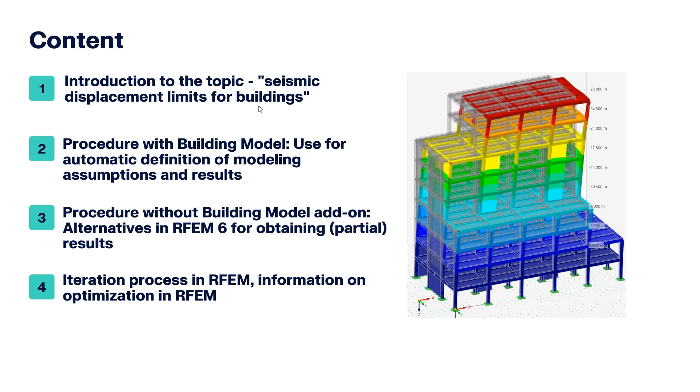Let's get started with the first topic, the introduction to seismic displacement limits for buildings. The reference for today will be Eurocode 8, design of structures for earthquake resistance. This reference applies for the whole of Europe, particularly maybe in countries like Germany or low seismicity countries it's not that relevant, but we will make here an exercise or example in which the seismic displacement is the controlling action, the seismic action.

I just want to remark that I'm going to present several sections from Eurocode 8, but not all the requirements are exactly what I show here. What I want to say is that this summary can be understood as a good pre-dimensioning tool, or a first iteration procedure, but further requirements and sections have to be complied with according to Eurocode 8. It is recommended that a full review of the norm should be taken into account. As I say, this is maybe the first step for these checks.

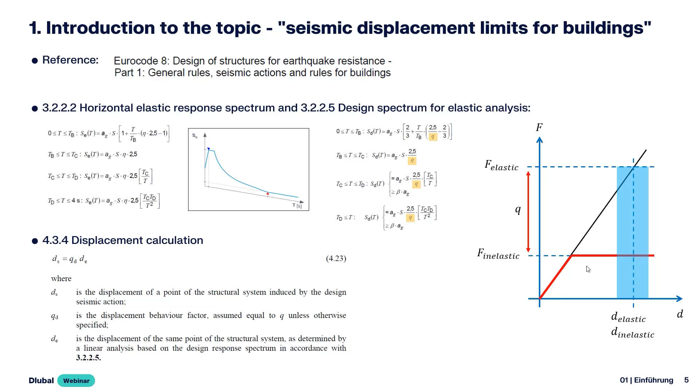Now I jump to the third section here: the limits of the so-called interstory drift. First, here's a picture of what interstory drift is. It's the relative displacement between the top of the story and the bottom of the story. We have to control this measure of displacement in each story, not necessarily over the overall structure.

We have three limits, and these limits are for dimensioning and design of structural elements, but the description or classification of these three limits depends on the description of the non-structural elements.

It's very important to take this into account from the beginning, in the prefeasibility or other early stages of design. It's quite important to define the description of the non-structural elements.

If we have brittle materials, we have a certain limit, while the description of ductile non-structural elements might be really important for the construction site. The costs of these non-structural elements according to classes B or C might be too high, and we may have to switch to approach A.

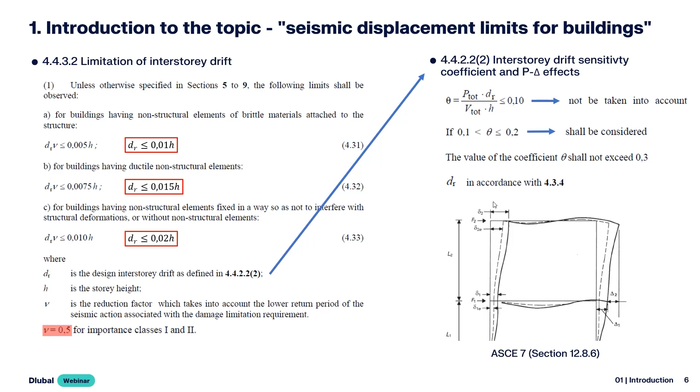And once again we see here another reference to our second section, 4.3.4, which means the multiplication of the displacement based on the design spectrum. So, let's start on the second chapter of today: the procedure with the building model.

I have 4 steps and then a couple of sub-steps. I'm going to once again present several sections from the norm, and after that I'm going to jump into the model. Let's check out two important sections here.

The first step: modal analysis. Based on an available model, we will define a modal analysis, and after that a response spectrum analysis. For this, we want to take into account the stiffness according to 4.3.1 and subsection 7.

That's why I started with this figure in the introduction. This section recommends that the stiffness, when cracking takes place, should be taken into account. This cracking takes place in the inelastic response. If we say the red line is the actual response of the building, at this point we expect some reduction in stiffness, and the recommended value is half of the corresponding stiffness of the uncracked element, for shear and for flexural stiffness.

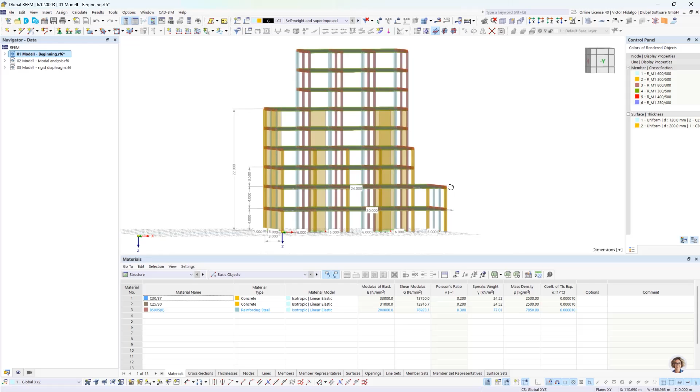So I'm going to start with a description of the building. We have a very irregular building here, with jumps in the geometry of the stories, and I did this on purpose to illustrate the concept of irregularities.

Just as a quick description, we have here a reinforced concrete building with walls, very stiff walls one can say. I'm going to show them here with visibilities. In the navigator views, we have some predefined visibilities which help us with the inspection of the model or visualization.

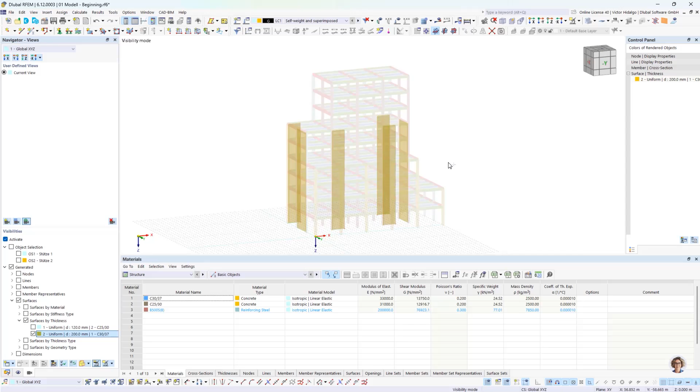So we can see here 6 walls which are conceived to limit the lateral displacement of the structure, exactly this interstory drift.

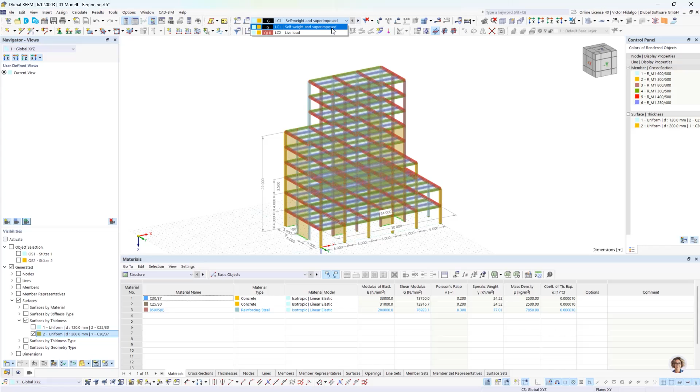Okay, I'm gonna cancel the visibility, come back to the original view, and show the loads definition. So I have 2 load cases: self-weight and superimposed live load. In this case, I have a very general definition, quite simple for today's exercise. Yeah, of course, so that's our base model.

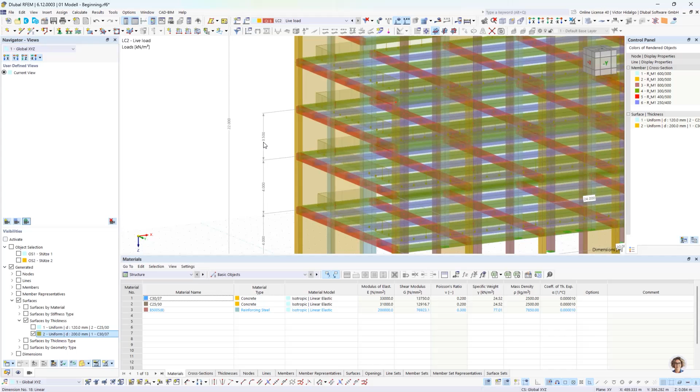Also, just to say, the first 2 stories have a height of 4 meters, and after that we have 3.5. So this is gonna be important when activating the building model. Okay, so we have this general overview, and now we want to define our model analysis.

For this, we will go to the button Edit Model Base Data, and here we can activate the desired type of analysis. In our case today, dynamic analysis. If I click on Response Spectrum Analysis, modal analysis will be automatically activated. And according to what I want to calculate, I can select other add-ons.

In this case, it's just of interest, this dynamic analysis, and take into account that when we activate something here, we might need to provide a norm or design standard for the corresponding new feature in the program. So in this case, I'm gonna leave Eurocode.

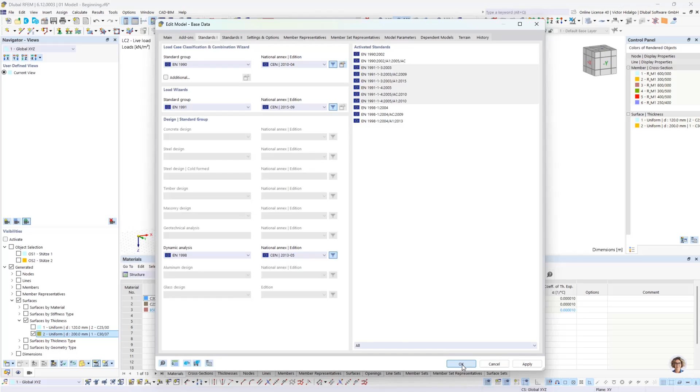Now I can go to edit active load case. In this menu, I can create a new load case of type modal analysis. So I'm gonna call it modal analysis 1, and this is gonna be basis 1.

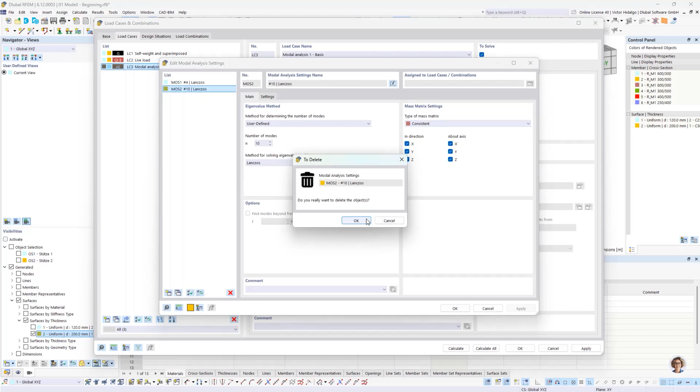I'm gonna edit the settings. I erase the second, and I'm gonna make here a typical definition for modal analysis to reach effective modal mass factors, typical value of 90%. And then we are limited to this method for solving.

On the mass matrix settings, I'm gonna choose diagonal on a classical building analysis with the 2 horizontal components and just the theta component, so the torsional component.

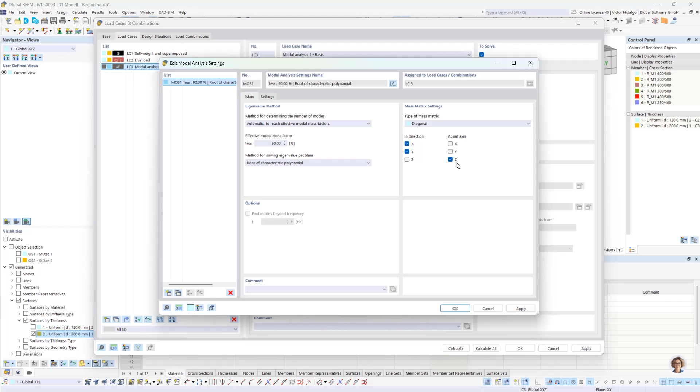Apply OK, and then we have to select a proper import masses only from load case load combination. Each code defines the kind of combination of vertical loads that has to be selected here.

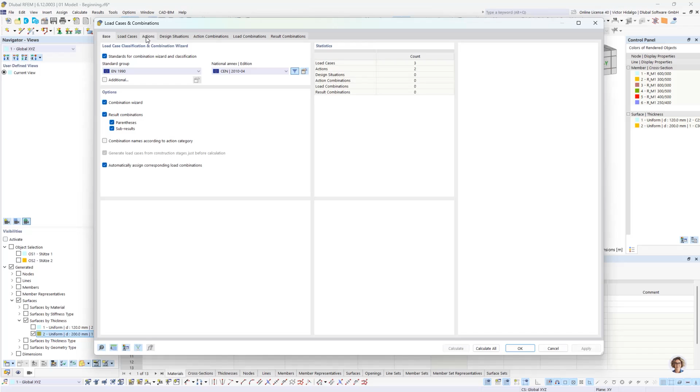I'm gonna show how to do this from scratch. So this means here in base, in the tab base, we can activate our combination wizard or assistant. With this, we can automatically generate combinations according to the norm, the selected norm, in this case, Eurocode.

In design situations is the basic definition, and we select here, for example, seismic mass combination. With this, we will get subsequently here in load combination the corresponding factors and multiplication according to the desired design situation.

Here in assignment, we see a factor of 1 for self-weight and superimposed, and live load with 0.3. So that's according to the norm. So that's quite useful in our program.

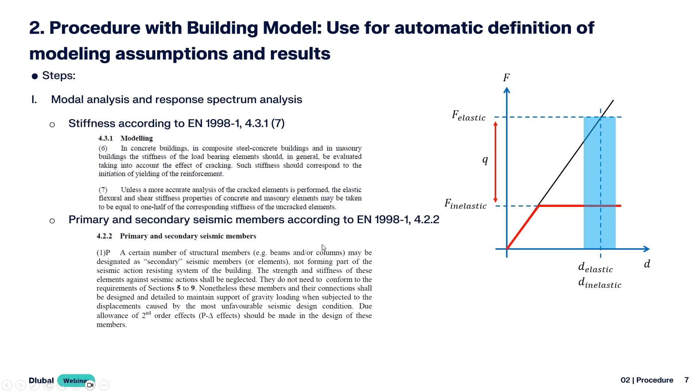So after this, I can define a second modal analysis, and we are gonna do the following thing. So this is gonna be the basis. In this case, we are not considering any of these two sections. Then we will make a second iteration with just the 4.3.1, and then a third iteration with these two sections. Yeah, okay, let's do that.

So I'm gonna copy this one. Okay, and after copying, I'm gonna change the name to 2. I erase this here, and I prepare in advance a structure modification.

This is quite a useful tool in our program, and it's very useful in this case. So I have 2 definitions, I'm gonna show them. So here you can activate what you want to have, in this case members and surfaces. And for members, I made the following definition.

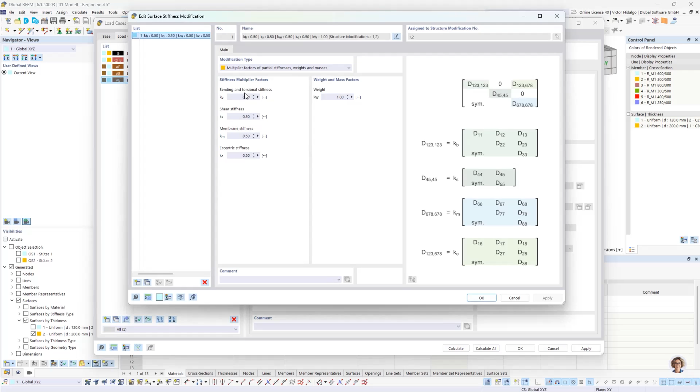I'm going to select the second structure modification. I forgot to show the surfaces definition in the first structure modification, but in this case it's also a 50% reduction, so this stays the same in the second structure modification.

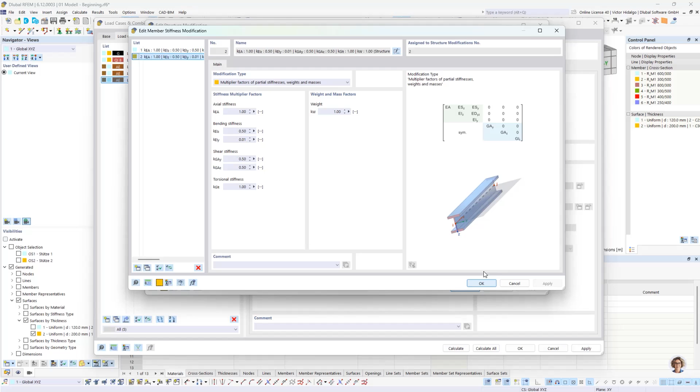What I did here is make a strong axis definition of stiffness in the members. This is the bending stiffness. I'm ignoring the bending stiffness around the weak axis for certain elements—what we can call secondary beams, or just vertical beams.

I'm going to show in the program what's the effect of not considering these elements that do not belong to the main earthquake resisting system, or lateral force resisting system.

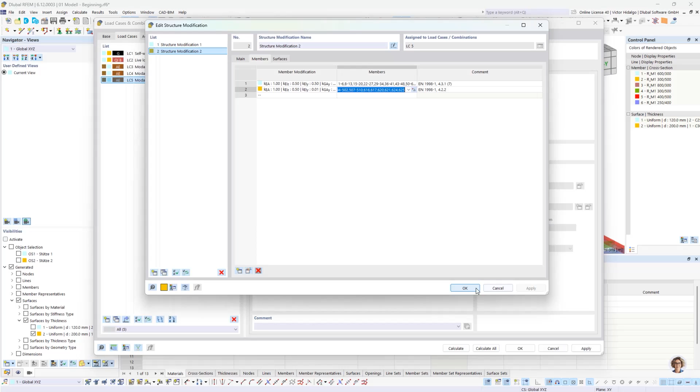Here I can write the second paragraph. So we accept this and we can run the modal analysis. It takes around 30-40 seconds for each modal analysis, so I already did it for today's presentation.

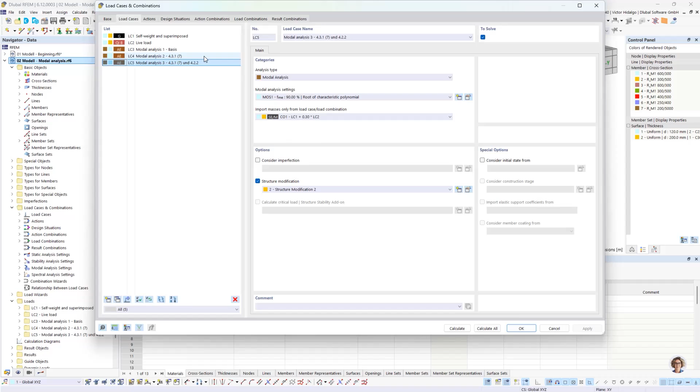I'm going to show that the definition is exactly as we did before. We are going to take a look at the modal analysis results. On the table we can go to modal analysis, natural frequencies, and we see for our iteration number 1, a natural period of 0.92 and 0.76.

If I change to the second iteration, the stiffness reduction, we will see a huge change in the structure, from 0.92 to 1.24. It's quite a big difference, and it's very important to always keep in mind this requirement about stiffness. This is a typical or classical assumption in earthquake analysis, and here we can see how different this is—quite a different approach compared to design used for vertical load. We don't normally do this for vertical load.

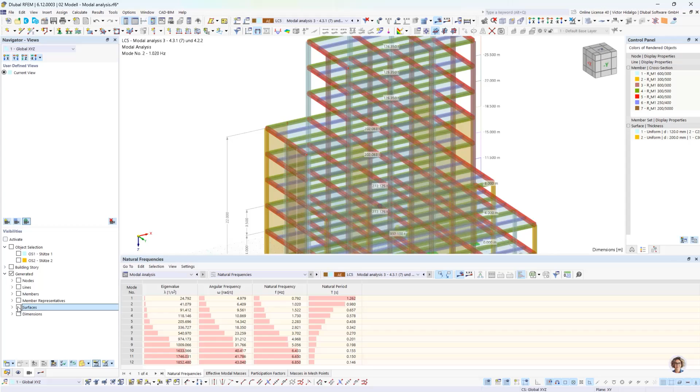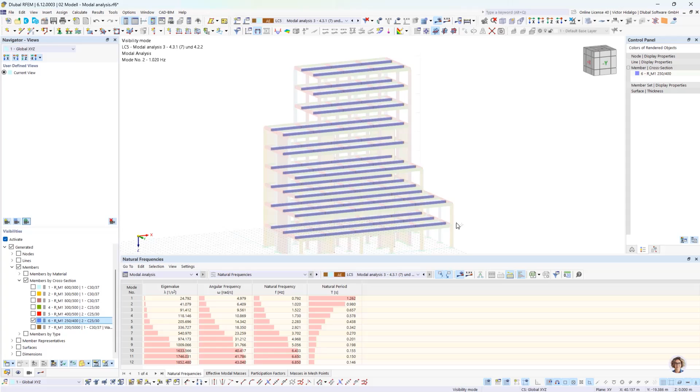Modal analysis number 3: here we have the consideration, or non-consideration, of the secondary elements. In this case, the secondary beams—I'm going to show them here in members, cross section. I'm saying that all these secondary beams will not have flexural stiffness around the strong axis, in order to avoid their participation in the lateral stiffness, as we expect these contributions shouldn't be that big since they don't connect to any column—there's no frame. We can see that the result remains almost the same, just a small change in the decimal places.

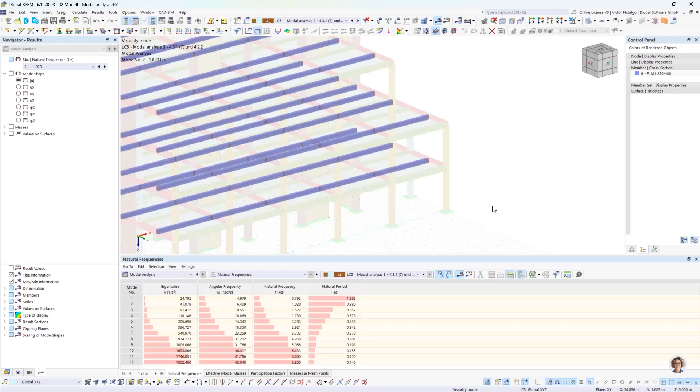After this, I'm going to work with load case 5. This is going to be our reference, and just to show you how you can inspect modal analysis results—a quite important table here, effective modal masses. You can see, for example, if you want to display the deformed shape of a particular mode, you can select in this drop-down menu what you want to display. Also important is the factor for effective modal mass here.

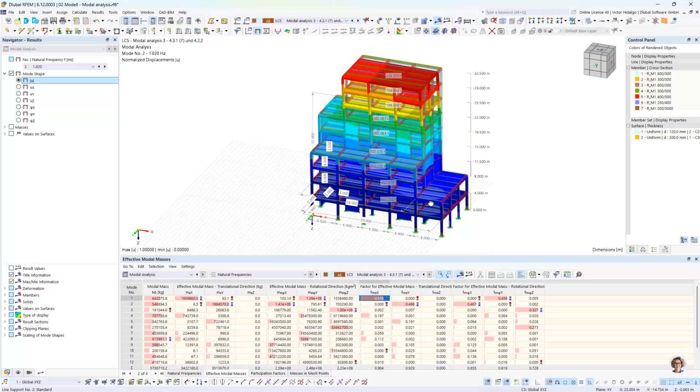I selected this geometry to show a very particular effect when we have irregularities and also a very stiff element, such as walls—so-called shear walls—combined with frames. This interaction plus the irregularities creates a particular condition where the fundamental mode has a participation of around 50%, which is relatively low. We are used to seeing maybe 70 or 80%, and with these particular geometric conditions we can see that the second order modes are quite important in the building's response.

Okay, just wanted to show this. Now I want to define a response spectrum according to the content in the presentation. After doing this modal analysis and this stiffness, primary and secondary definition, we can make the definition of the horizontal elastic response spectrum and design spectrum.

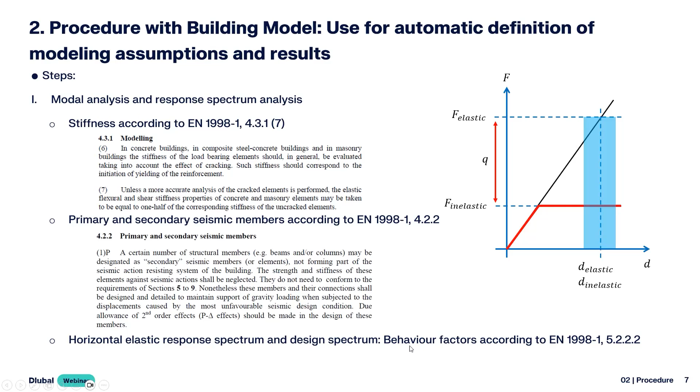Here it's important to make a definition of the behavior factor. The behavior factor is defined or specified in section 5.2.2.2, so I recommend a full review of this section. In this case, for our concrete structure, I made a definition.

How this works is that according to the location and according to the norm for a particular country, it is defined which ductility class, or which kind of requirements, I have to fulfill for this particular place. For example, in Italy, with high seismicity, I have to select a structure that fulfills particular requirements. This is provided by the norm.

Because of time I can't give a full explanation, but let's assume that according to the location of this building, I have to use ductility of middle class type. Based on the description of our system, we have a dual system, coupled wall system, and this is the base definition for our behavior factor.

As we see in the title, it's for systems that are regular in elevation. So I can calculate the first or basic value of the behavior factor, and after that I have to check for irregularities. In this case, the building is irregular. I recommend you check out the section in detail after the presentation, but here's a definition.

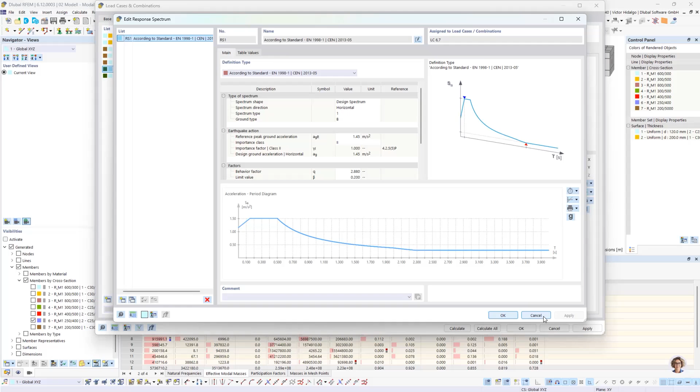Important here also is to create a second response spectrum, and as we saw, if we use a response spectrum of type design spectrum, we have to multiply the results for displacement. So in this case I'm gonna do this in a particular way here, but there are many ways of doing this.

What I'm gonna do is create a second analysis, and I say okay, if I multiply again by a behavior factor Q, then I get this.

And I'm gonna use here this scale factor definition. So if I multiply again by the behavior factor, I'm gonna get the correct results for displacement.

Okay, I accept this, and now I can run my response spectrum analysis. I'm gonna jump into the presentation once again, and okay, now we can make the activation of the building model add-on.

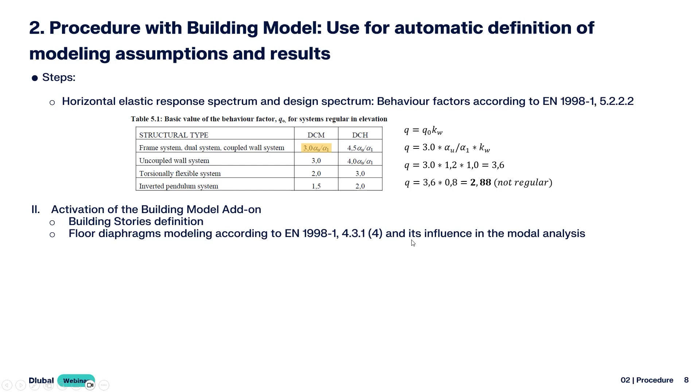Before running our response spectrum analysis, I'm gonna make the building stories definition and the floor diaphragms modeling according to this section 4.3.1, and I want to show the influence in the modal analysis of this.

This floor diaphragm modeling makes reference to a very famous assumption in seismic design or seismic analysis, the so-called rigid diaphragms. I want to say that it is not a better or a worse definition.

It's difficult to make a general rule whether we have to use this in our case or not. There is a condition here, a physical condition or a clear rule where this assumption can be implemented in the model, but generally this is a very engineering concept and interpretation, whether we are allowed to use this or whether we should use it.

Now I just make reference, but as I say, if you are in a case in which you might want to implement this, my recommendation is to run a couple iterations, as I'm gonna do right now, and try to have a feeling about the results and try to make an interpretation whether it is appropriate to consider this or not, or what are the effects of this, beyond it being typical to do it, so let's do it.

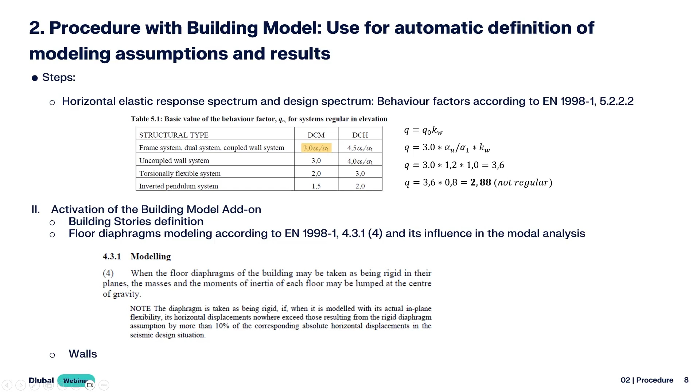And also here in the activation of the building model add-on, we can define walls. I'm gonna activate this. Once again here, edit model base data. And okay, there was already a definition.

Okay, so building model. When I activate this, I get here in building model this object or this folder, and I can edit the definition.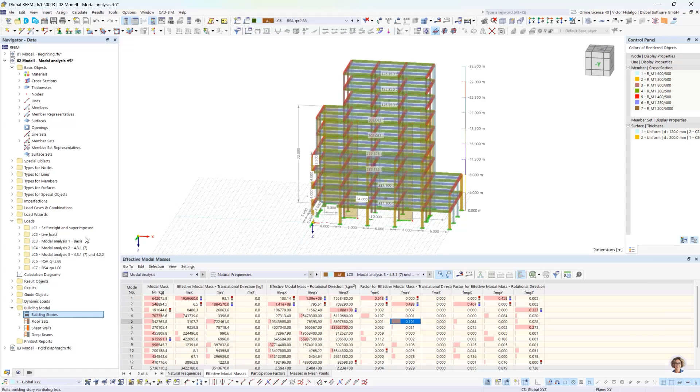So I had here a predefinition with two different stories, but I'm gonna erase this in order to display how it works. So I erase the building model, and I'm gonna generate building stories from scratch.

Then I go to edit, and the program automatically recognized the different floors, or the planes of the horizontal element. With this automatic definition, we can save time in the definition of the stories, and it's quite useful to have this manual definition.

Now we can make global adjustments. In this case, I'm gonna leave this as it is. For floor diaphragms, I'm gonna consider no assumption in the stiffness, so I'll leave original stiffness. I have a second model with the rigid diaphragm, and we can see a basic difference between these two approaches.

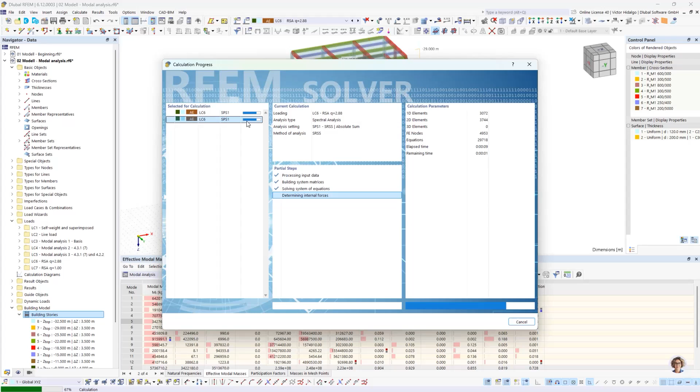Okay, I'm gonna leave that and run this response spectrum analysis. It takes not that much time since the modal analysis is already available. Here we can see the progress bar and an estimation about the remaining time.

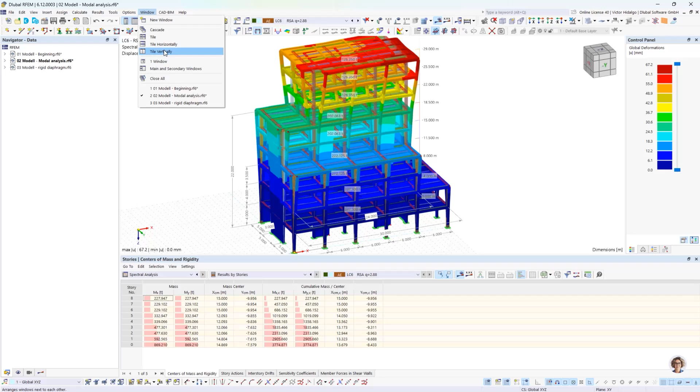Okay, here I have the same model so far, but with a model definition of rigid diaphragm. I want to show this for comparison purposes, so I'm gonna use window, tile vertically, and then close our first model.

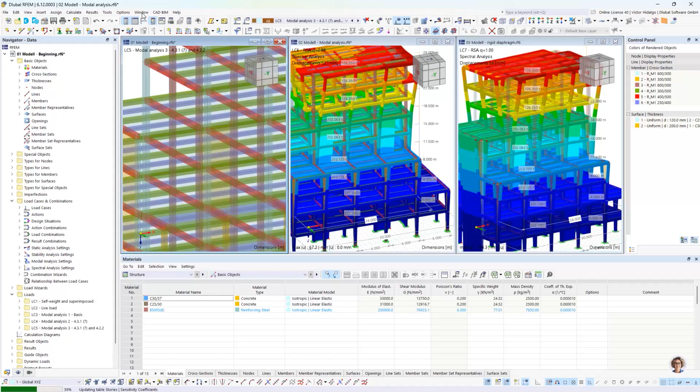Okay, and then once again I'm gonna go here, just takes some time. Window, tile vertically. So we have on the left the results for the model without rigid diaphragm.

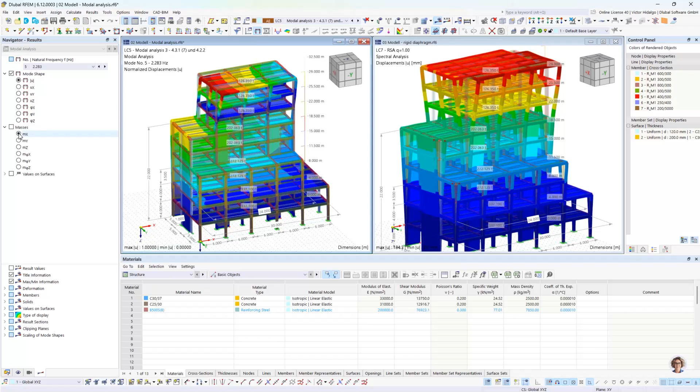In this case I want to display once again the results for modal analysis, and I'm gonna use this result for masses. What we see here is that according to the mesh settings on the program, with this basic definition we have a mass definition on each point of this mesh.

So this is quite a complex mass matrix definition, and if we activate the option of rigid diaphragm, I'm gonna show here, we get a very simplified description of the mass matrix.

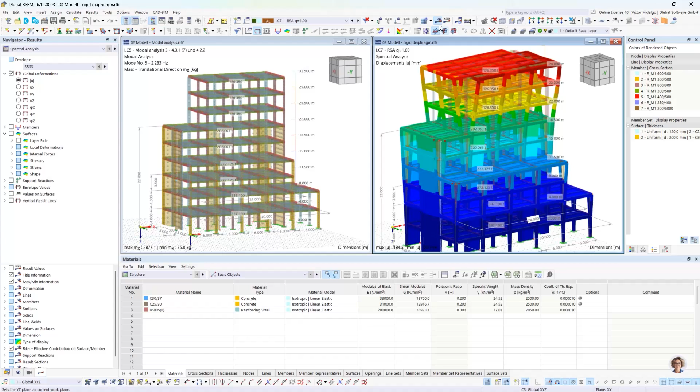So in the first place I want to show you the definition in the building model add-on. In this case I have the same definition, but I selected all stories and created the rigid diaphragm, floor diaphragm as rigid.

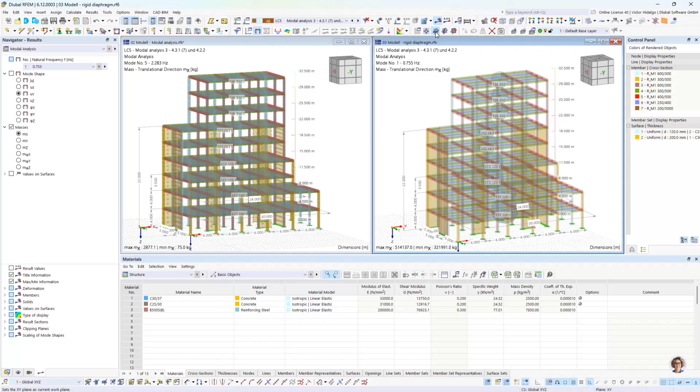I already ran the analysis just to save time, and in the same way I'm gonna look for the results of the modal analysis, iteration number 3. Once again the masses definition, and we see a huge difference in the masses definition.

Now in this case we have what we call lumped mass definition on the center of the element, or of the floor. So this helps a lot in the analysis time for this model.

Okay, once again it's important to keep in mind that this has to be analyzed, whether it's better the option on the right or on the left. There is no general rule for this.

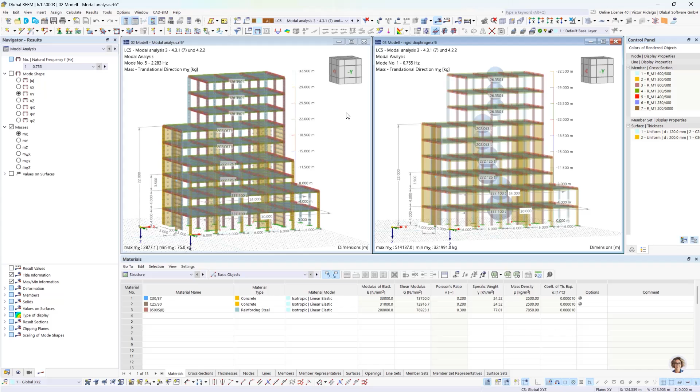Okay, I'm gonna jump on the model on the left and I'm gonna show something: the walls definition. So I'm gonna make a new shear wall definition.

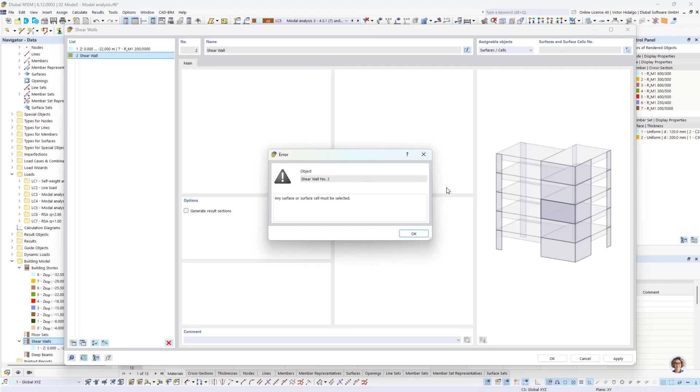There is already one, and this is quite versatile because I only have to select the surfaces and the program is gonna recognize the geometry of the wall. So I'm gonna select this wall, simply all the surfaces, and the program is gonna recognize the cross-section dimensions.

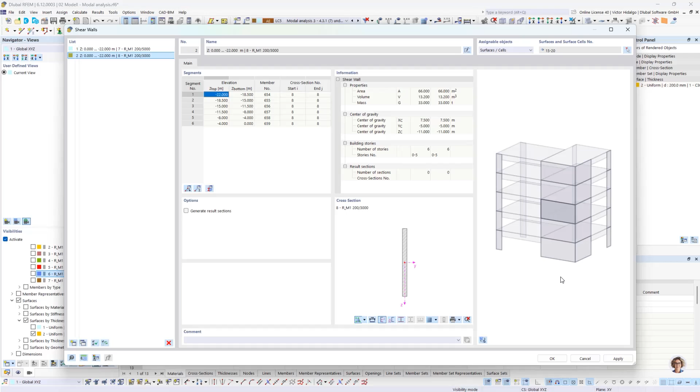And also the floors definition, and with this I can integrate the results for the areas, because for design we need the results in form of a member. Exactly, so this is quite versatile and useful for a quick definition.

Okay, I have to delete results after creating a wall, and we see here an internal element that's gonna integrate the results for all these areas.

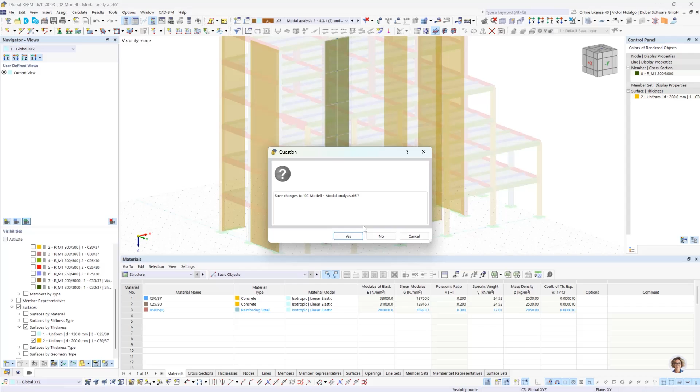Okay, at this point I'm gonna close this model, and I'm gonna stay in the rigid diaphragm model for the last part of this section. Okay, I come back here.

We activated our building model add-on, and now we have to check the requirements for the limitation of interstory drift. According to the floor definition, I made here the multiplication, and our limit is gonna be 35 millimeters. I'm gonna select brittle materials for non-structural elements, and in the first place I have to check the requirement of P-delta effects.

Okay, and finally we can deliver the results for design.

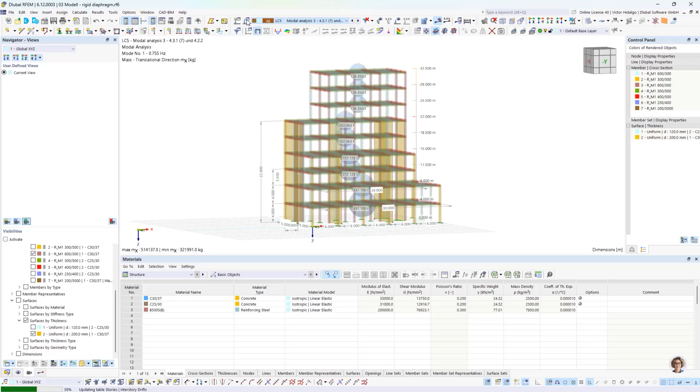So here, important: if we are gonna check displacement results, remember we have to use the multiplied displacement from the response spectrum. So in this case, once again, I have to use the response spectrum analysis definition with the scale factor.

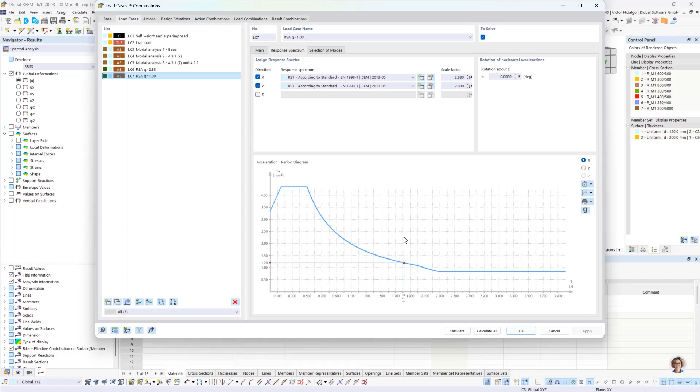This is quite important since the beginning of today's presentation. Okay, I'm gonna run this analysis. Oh, sorry, yeah.

So, it's already there, the analysis, and in this case, with the spectral analysis and the building model, we have an additional table of results, and this is what we are going to inspect right now.

This is the results by stories. Here we have this group of tables with quite important quantities: centers of mass and rigidity. The calculation of center of rigidity is quite particular—we have to take into account the shear walls and the particular stiffness of each column. So this is a very good result or summary for our structure.

In story actions, we have the summary of story forces, its delta, and the location of resultant story forces. So for checks of stiffness irregularity, if required, this table provides the base information for it.

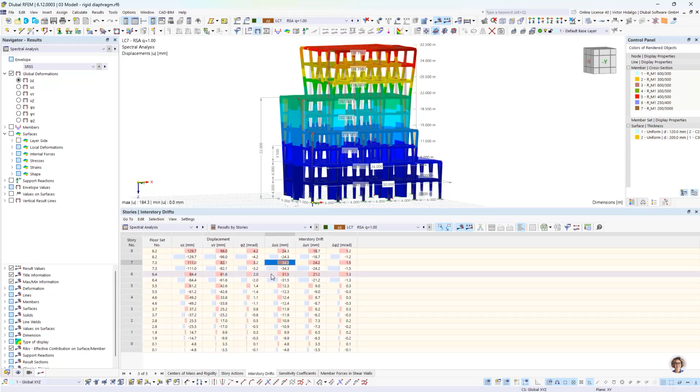So I made several iterations to, in the cheapest way or with the smaller sections, achieve this value. And of course, this is the objective of the design now—the most economical way to fulfill the requirement.

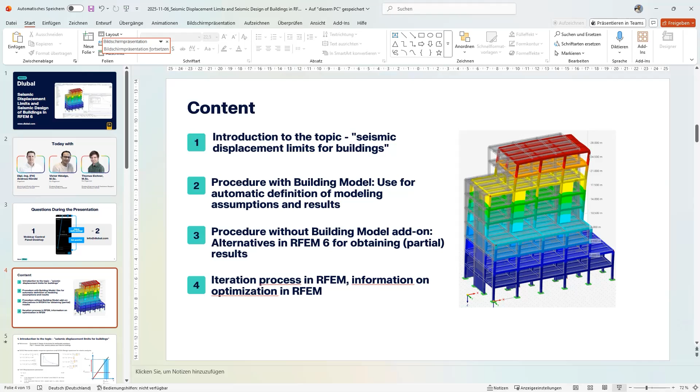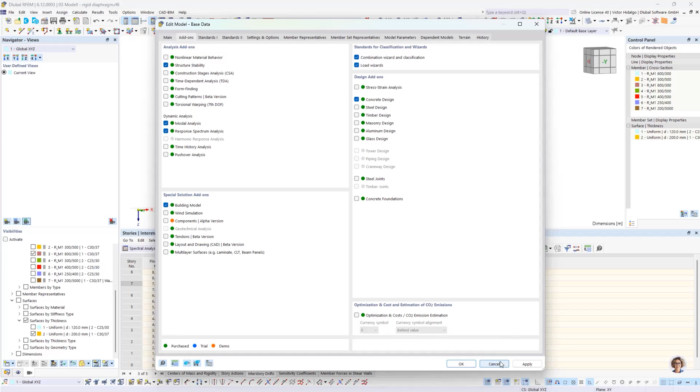So this part is done, and after this we can see how we provide the design add-ons with the information for design. In this case, I already did it, so we can activate the concrete design add-on, and in accordance to this, we can create additional design situations—in this case, seismic, or permanent and transient.

Important: when we have seismic and we want to consider response spectrum analysis results, we have to use a result combination. Otherwise, we cannot consider these results. So in result combination, we get 2 because we have 2 response spectrum analyses.

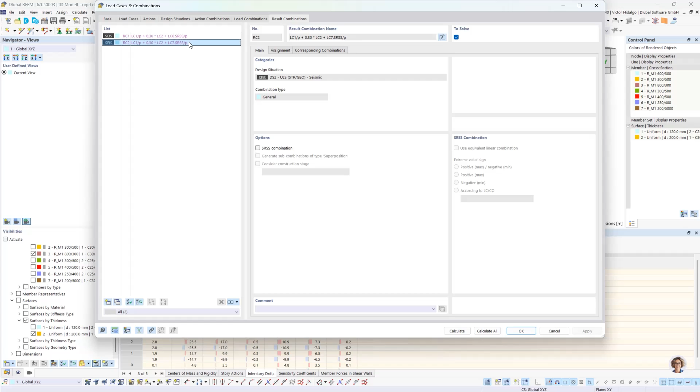And after this, I can go to the table design, or concrete design, and make the definition. I'm going to make input data here, so we can select what we want to do.

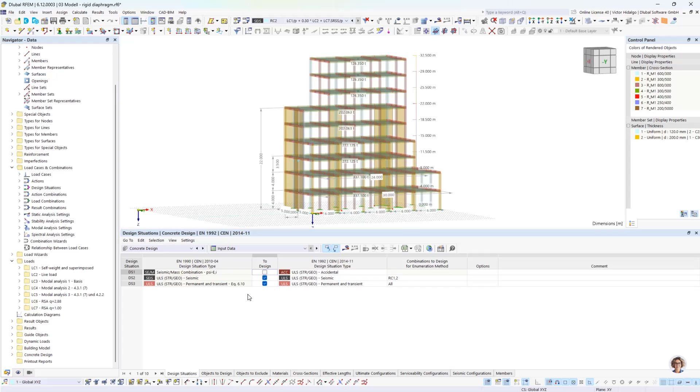Very important—we have separate webinars for this, but here I just want to mention that in concrete design add-on settings, you select the seismic configuration. This is not available by default, okay? And as I said, you can make a complete definition here.

In this case, I can check the results in general. There are some seismicity checks that are not considered, not fulfilled, and I just want to point out that in input data and design situations, I selected result combinations 1 and 2, but the second one is considering the multiplied response spectrum. I made this on purpose because this cannot be used for design. The correct definition should ignore this—this is just for displacement checks. This is the reason why we have some design ratios bigger than 1.

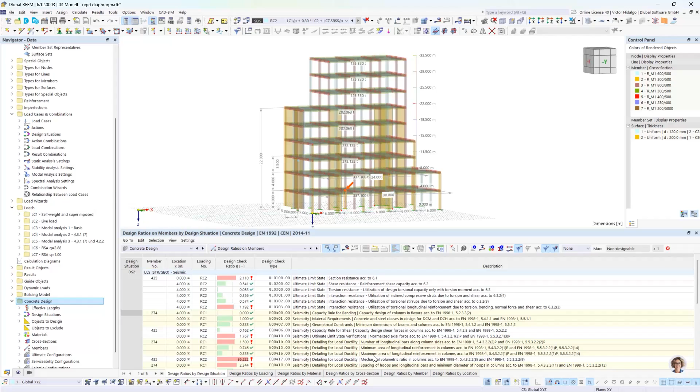Very quickly, I'm going to show now what we can do in the next chapter, and this is quite summarized: the procedure without the building model add-on. We can do very few things without it. The first part we can do, but basically all the features we saw here, we cannot do.

This means we have to do a very manual procedure—for example, exporting to Excel and then making calculations by hand, in software but manually making all the definitions. So the only quantity that can be generated without the building model add-on is the story forces.

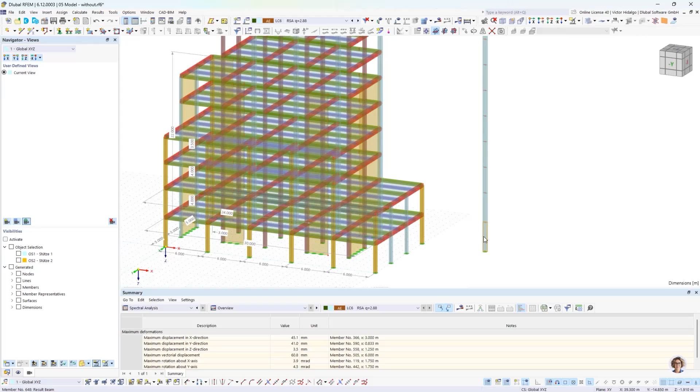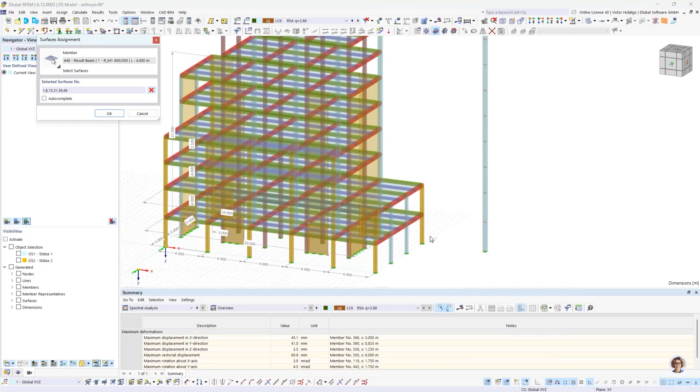For this you have to do the following: I created a result beam. This result beam has no influence on the stiffness of the building or structure, so it's going to be ignored, and it works as an integration element. I selected 'integrate stresses and forces from listed objects,' and on each floor I selected the walls—all the walls for the first floor—and then all members, or in this case all columns, for the first floor.

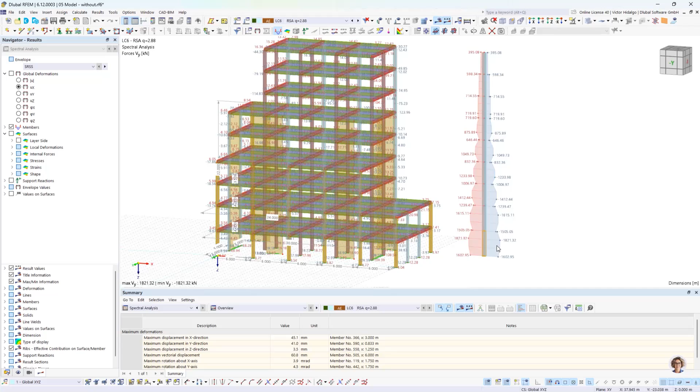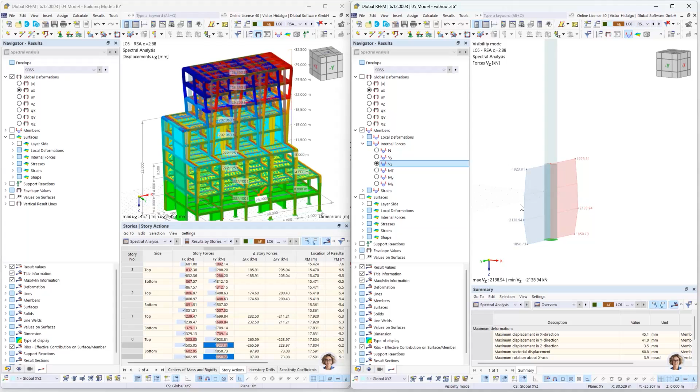And by doing this I can integrate the results on each floor, for each result member. I'm gonna isolate this to have a clearer view. What we see is that here in the first floor we can recreate the 1602 value, same as before. This is bottom, and top is the 1505 - same result. So if I change here the internal forces direction and the other direction, I get exactly the same values. So this is the only result that we can reproduce.

As a summary, all these other values we cannot automatically get results from RFEM. So we have to either export to table and make a manual definition, which is why the building model add-on is quite useful.

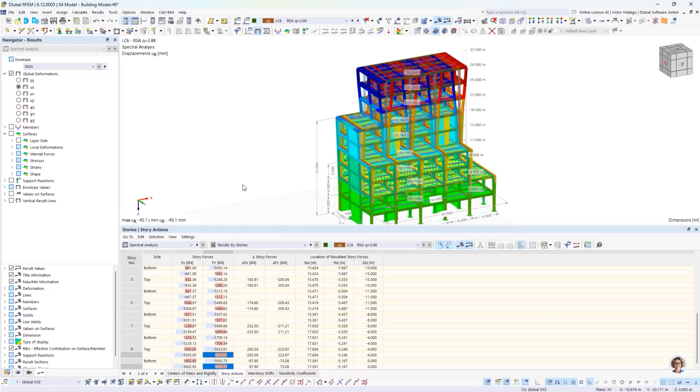And well, design can be done as I previously showed. Use here the final remark.

As a general conclusion, our hint for the optimization and iteration process - I always mention that for the modal analysis, we have to make maybe 1, 2, 3 iterations to have a sense of results, also integrated with the assumption in the building model add-on.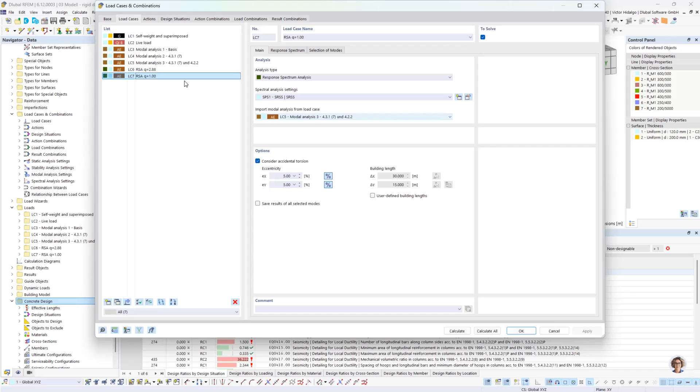Also, for example, the results for the response spectrum - after this we have to make a design, and if we do not fulfill something here, we have to go back to change probably dimensions in the elements and carry out the whole design again. If I make a change in the dimension of this column, I have to go back and run again the modal analysis and the response spectrum analysis, and perform once again the design.

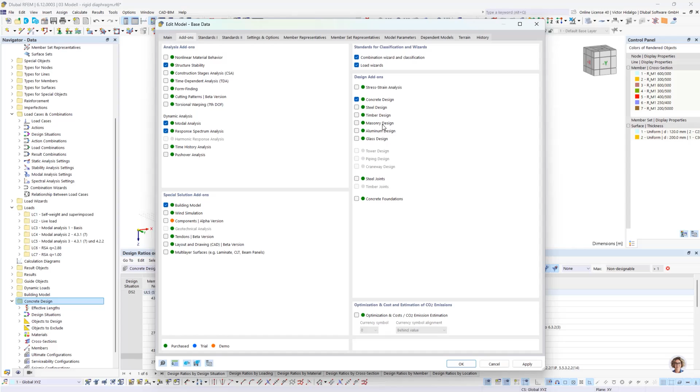So for this iteration process, very intrinsic from seismic design and analysis given this iterative condition, our program offers a very versatile and useful approach with our design add-ons. Our philosophy is all-in-one - you activate and select what you need. In this case we made use of 4 add-ons, and you don't need an additional application for this. That's why RFEM is very useful. That's the final conclusion on this topic.

Drift limits or interstory drift limits - in this case, I give back to Andreas. Thank you for your attention, Andreas, you can take the presentation.

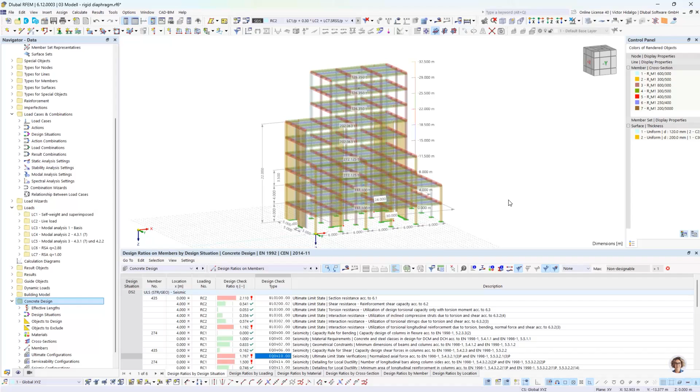Thank you, Victor, for your nice presentation.